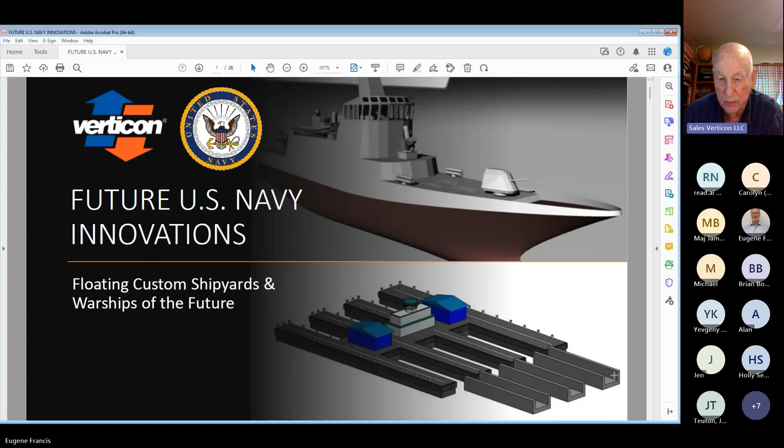Next slide, Eugene. So, we made our initial presentation a couple of years ago. And so I went over this to see if it was still timely, and it is. In fact, it's even more intense right now than it was a couple of years ago.

So what is the status quo that we're dealing with? Well, we've got some gathering storm clouds. We've kind of got these new axis of evil with China, Russia, North Korea, and Iran. We seem to have a current dilemma in our ability to ramp up and meet some of these existential threats. Some people don't even think they're existential threats at this point. I would beg to differ with them. Back in 2014, Congress mandated a 355-ship Navy. And just within the last few months, Admiral Gilday, Chief of Naval Operations, really indicated in one of his discussions that we actually need a 500-ship Navy.

Well, we're struggling to get to a 355-ship Navy, and so a 500-ship Navy was kind of surprising to us. And then Rear Admiral Selby at the Office of Naval Research came up with the concept of small, agile, and many vessels. And since we kind of thought the way things were flowing, I think we were right. Very simple, small, autonomous, agile, attritable vessels or minimally manned vessels seem to be the direction that things are heading. And so that's kind of how we've pitched things.

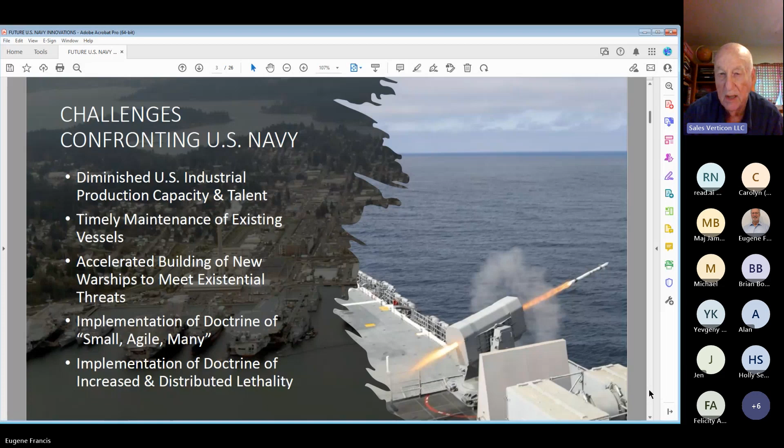So how do we increase production capacity? These are our objectives: we want to significantly improve the maintenance capacity for existing vessels, provide expedited design, engineering, and fabrication of new vessels, and integrate this concept of small, agile, and many.

What we're talking about conceptually is dual use. It doesn't make a lot of difference to us whether it's a naval vessel or a commercial vessel of various kinds. We've had some discussions about building icebreakers. Strangely enough, the Arctic still has ice that needs to be broken. Russia is building new nuclear icebreakers. We have one old icebreaker, the Polar Star, that's broken down half the time. So we think there's probably a need for some icebreakers for the Arctic.

So how does a small business tackle all of this? I know what we do and I know what we don't do. So I defined the areas of talent and capability that we need, went out into the world and identified a lot of key players, brought them in, talked with them, and basically we have a core of true believers.

These are all companies that believe they're Western companies. They all believe in freedom and prosperity and self-determination, and they don't particularly like what's going on with China, Russia, Iran, and North Korea at this point. Some of these are listed here, and we have many, many others that we've added in the interim.

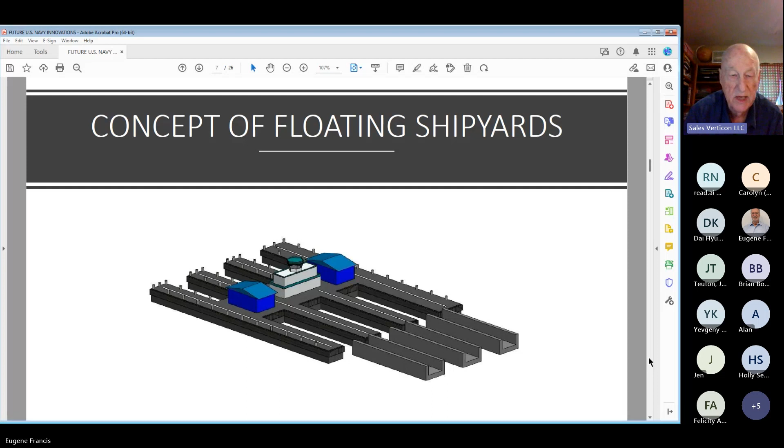Next slide, please. This gives you an example of a floating shipyard that we designed for a country. We'll talk a little bit more about that later.

They're modularly constructed. We can place them anywhere in protected waters. As I said earlier, they're custom designed. Obviously, we have to make sure that they're ecologically sound, so we have to worry about wastewater and all kinds of other processes that give off caustic chemicals or coverings or whatever else. So that's foremost on our mind.

A lot of the shipyards that we have quoted, the modules transit on their own bottoms. That is, there are ships in their own right. They have small crews, and so they don't need tugs. We do build them with supplemental power sources, but the larger ones have all been quoted with propulsion on their own bottoms.

A lot of them are capable of dynamic positioning. So if they're in protected waters in a cove or a harbor, they will station keep within a couple yards or meters and maintain station. There are thrusters strategically located that allow that to happen, as well as a lot of gyroscopic stabilization equipment on board. They are designed to function in all weather conditions.

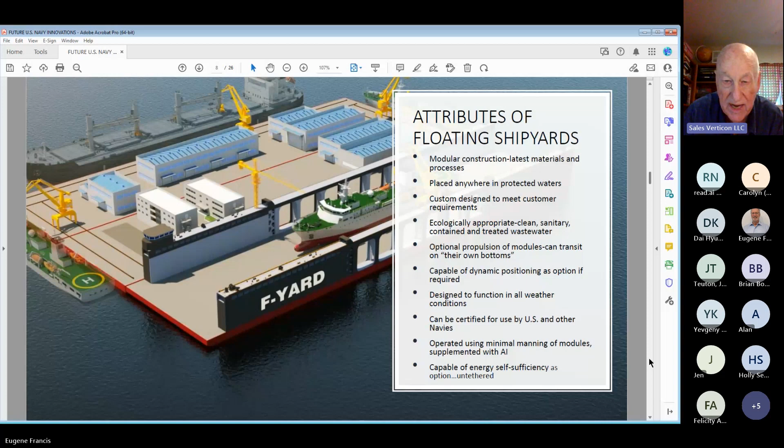Next slide, please. Little story behind this one. This is an actual design that we had presented to the government of the Solomon Islands. And I don't know if you're aware of what's going on with the Solomon Islands right now, but what happened was the Belt and Road Initiative of China came in at about the same time.

This is not unusual for us because we work in many different places, and we continually run into the Chinese Belt and Road situation that we have to contend with. In their infinite wisdom, the Solomon Islands decided to side with China, and I suspect China is probably building some kind of naval facility in the Solomon Islands right now, and we're not.

There are some real practical applications. This does show the breadth of what can be put on these floating shipyards. It basically subsumes advanced manufacturing technologies, robotics, additive manufacturing, all kinds of software. You can call it artificial intelligence, but to me, AI is just somebody else's software. Each one of these shops, each one of these applications, each one of these processes have software implications.

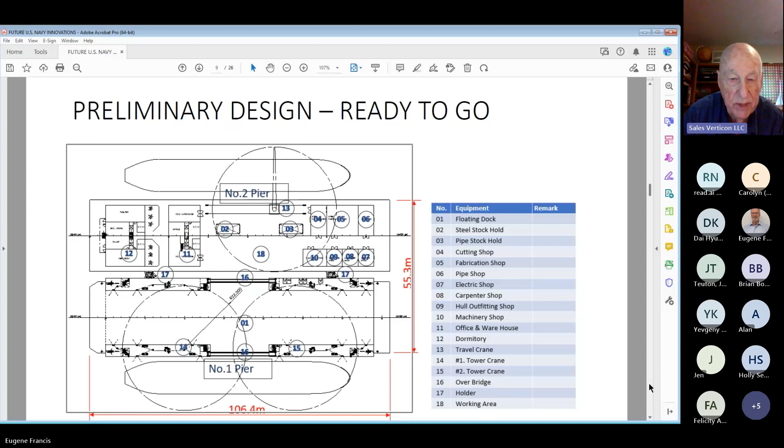Next slide, please. When I mentioned earlier that we pitched a floating shipyard here in Puget Sound, since I've been able to see what's going on at Naval Station Everett and the backlog of Arleigh Burkes over there—they've had as many as 6 or 7 in for maintenance at one time, and it's taken a long time—we thought, let's go ahead and propose something like this.

This is really composed of a number of modules that would transit on their own bottoms. We could have them simultaneously manufactured in different locations and brought together in Puget Sound, reassembled like this.

In the red there, you see those are large floating dry docks. People don't realize that on the west side of the country here and in the Pacific, we're down about four large dry docks. So we wanted to supplement the existing dry docks by producing these larger dry docks. These are very large.

They're 1,000 by 250 feet, so they would accommodate your larger ships. The larger carriers might have a little problem getting in and out, but they're very large and can accommodate very large ships. This could be located in Puget Sound, and it could be geostationary.

It could be tethered as well. Each of the modules would have their own power supply. We're taking a look at some small nuclear power plants right now that may work, but there's all kinds of other green energy we're looking at too. And of course, in Puget Sound, we have to be very careful about all the ecology we'd have to be mindful of. Next slide, please.

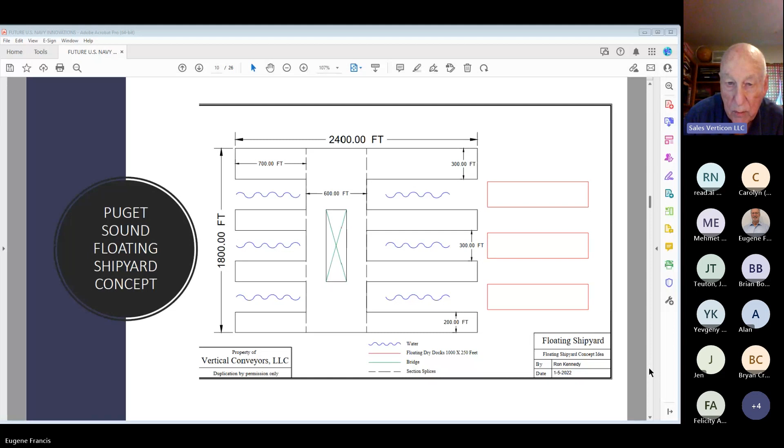So, when I mentioned that we have the ability to move platforms around without them being on their own bottoms, without their own propulsion, we have one of our participant companies, DTG Propulsion from the Netherlands, that provides these large outboard motor type assemblies that can be attached to the outside. You can also use tugs, but if you want to be able to move it around and station keep, then it's handy to have these kinds of thrusters associated with a platform.

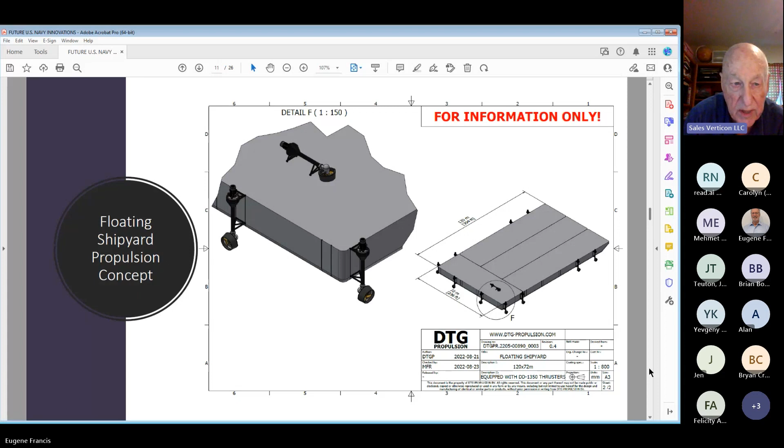Next slide, please. One of the things that we've taken a hard look at is containerizing the workshops. As you saw on that one slide that we did for the Solomon Islands, there were 8 or 10 workshops. Well, these can all be containerized in a single or multiple cargo containers, and that would expedite the placement of them on the platforms for the smaller platforms.

On station for our warfighters very rapidly. Next slide.

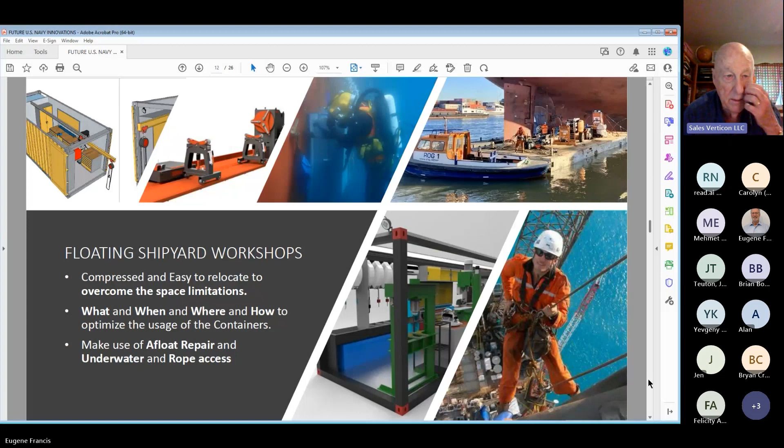So the operating philosophy is basically a merger of all technologies that are appropriate—whether we're talking about artificial intelligence, advanced manufacturing technologies, or digital twinning. We do have the ability right now to design a ship and build it virtually, and give people a headset and allow them to actually walk around the ship and stand on the bridge and look at the placement of all of the instruments and electronics, and provide input as to where things should go. So the idea is using the latest technology, whether it's materials or cyber or AI or advanced manufacturing technologies, 24-hour dark factories—those are all things that we're looking at.

We've got a strong effort going right now in robotics. You see that robot down at the right-hand corner there. We have a number of robotics companies that we have worked with or talked with regarding how one might design robotic work cells to design ships, to build ships. There's been a tremendous amount of work done in that area now, and we think that you can probably replace—there's a problem with welders.

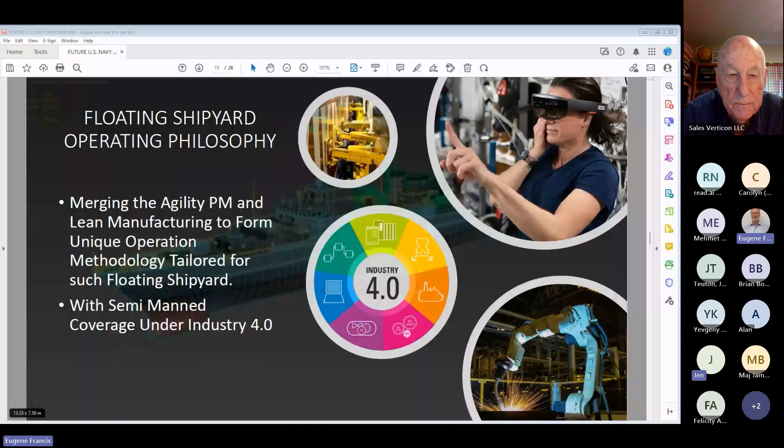Next slide, Eugene. Okay, well Major Best, did you have another question, or is your hand still up? Oh sorry, no sir, my hand's still up, sorry. All right, go ahead. Okay, go ahead, Ron.

All right, so conceptually we've been talking about shipyards, but the question is, if we had a shipyard, what kind of ship would it build? So we've gone ahead, and this is all on our own nickel, by the way, we've funded all of this privately. We've developed a really nasty one we'd call a Variant 1 Corvette, and it's designed around the concept of small, agile, and many, and the concepts of distributed lethality.

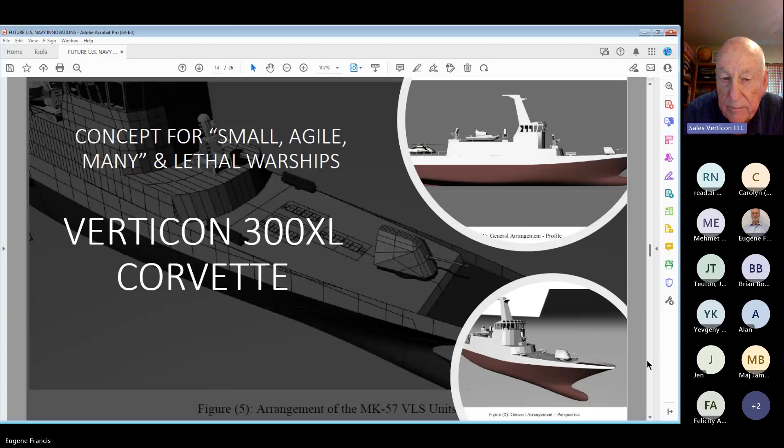Next slide please, we're down to about 10 minutes. We've had a number of design considerations, and it has to do with all of the technologies we're building into these ships. So we're looking at modular construction, moderate displacement, more heavily armored than a typical Corvette, conventional propulsion because it's simple and everybody understands it, fleet-proven systems so things don't go wrong like on the LCSs, and really multi-mission capable with modular weapons loadouts.

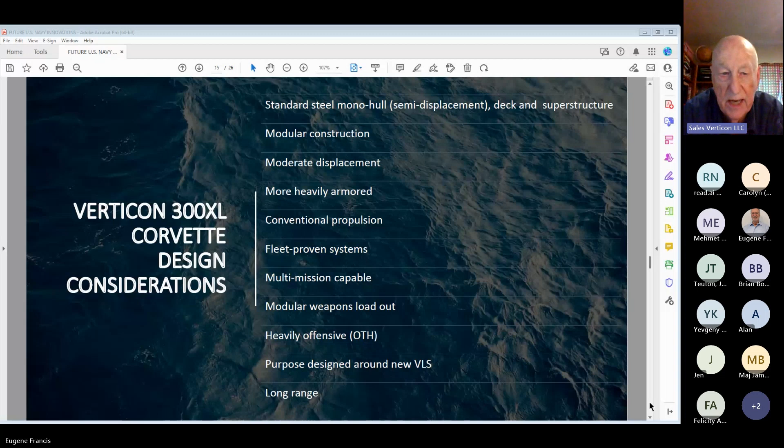Heavily offensive, which will become more obvious as we go through the slides here, designed around a new vertical launch system, not the Mark 41s, but the Mark 57s that handle all of the new missiles coming down the pike, and it has long range and is capable of dwelling for a long period of time. Next slide please, there's a lot of additional design considerations.

Primarily, what we wanted to do was design a ship because, as NATO has told us, 50% of the corvettes in NATO are going to be decommissioned within the next 5 years. They're looking for alternatives. So what we've done is we've tried to take that into consideration from a timing standpoint as well as a design standpoint, and provide them with a multi-use ship that is lethal enough that our enemies will have to pay attention to it, and they will not operate.

And this speaks a bit to the doctrine. We don't believe these will operate with the carrier groups. They're not designed to operate with the carrier battle groups. They are lethal enough in quantity that they're going to have to be accounted for by the enemy and draw fire away from the carrier battle groups.

So I'm assuming, Eugene, that these slides are going to be available for people to take a look at, and we're trying to cover a lot here. So that's generally the concept that we're talking about: very nasty, aggressive, offensively oriented, but very flexible, smaller vessels that you can mass produce.

Next slide, and we go through this pretty quickly. We put this here so that if anybody wants to look at the specific specifications of this particular vessel, this one has 12 VLS on board. We have a variant 2 with a 50-foot insert that allows for another 12 to 16 vertical launch systems, and it still maintains the helicopter pad at the rear. So that would be about 350 feet and displace about 2,200 tons.

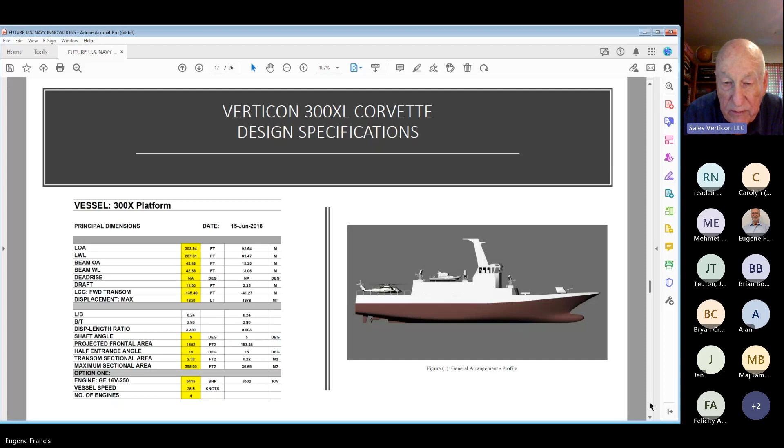So you can look at those. We've done a lot of testing on this already. Go to the next slide and we can talk about that.

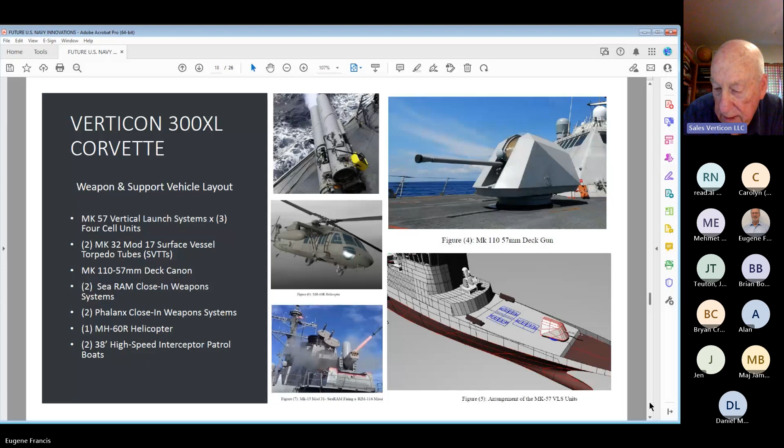Let's go through the armament quickly. There's the Mark 57 vertical launch systems on the foredeck. We've got torpedoes, we've got the deck cannon just in case somebody tries to get too close. We've got two close-in weapon systems, the SeaRAM, which is the rolling airframe, and two Phalanx close-in weapon systems. We have one large MH-60R helicopter that can be used in anti-submarine roles or whatever. And on this particular iteration, we've got two 38-foot high-speed interceptor patrol vessels that could be deployed to handle terrorist vessels in the vicinity. Next slide.

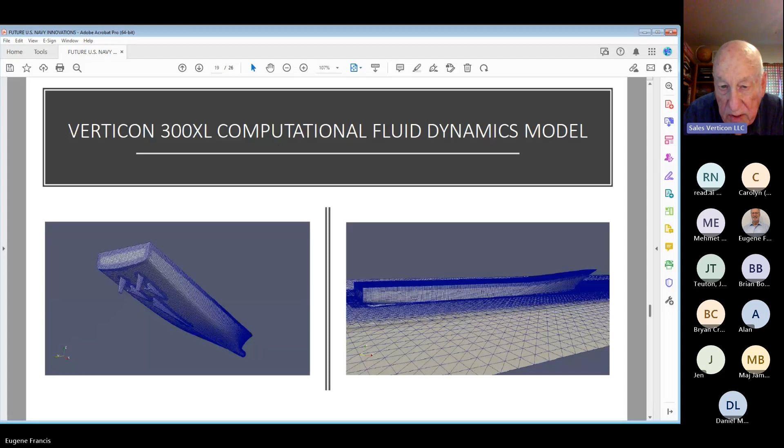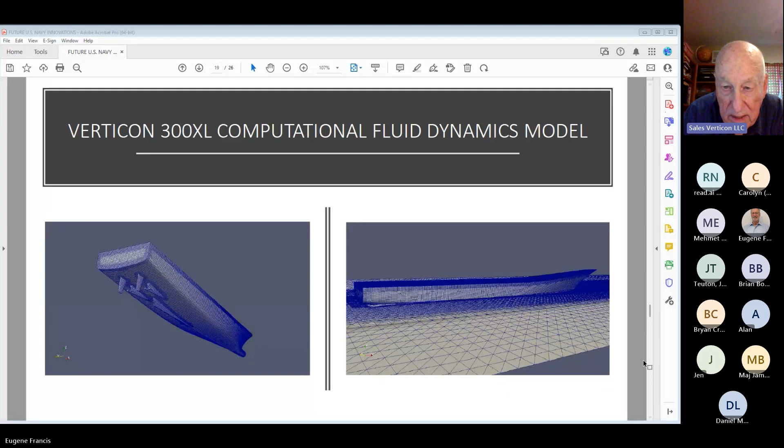We have done considerable engineering on this. We have designed the hull. We have used the supercomputer up at Ohio State University to run the iterations of this, so you can kind of see the pattern that we used. You can see the underside of the vessel. And if you go to the next slide, you can kind of see what it looks like. Skip that slide, you can look at that.

It basically says this is a long-legged ship and it doesn't use a lot of fuel. It uses four low-speed diesel engines that are very simple, very straightforward, through Wärtsilä gearboxes. What you get when you run iterations of a full hull load at various speeds is you can see exactly what kind of stresses and strains there are in the hull, and a bit of what the waveform looks like, which has a lot to do with the efficiency of the vessel. Having the bulbous bow, we tried it without, then put a bulbous bow on it, and it was 18% more efficient, used 18% less fuel, and got 18% better mileage. So the bulbous bow makes some sense.

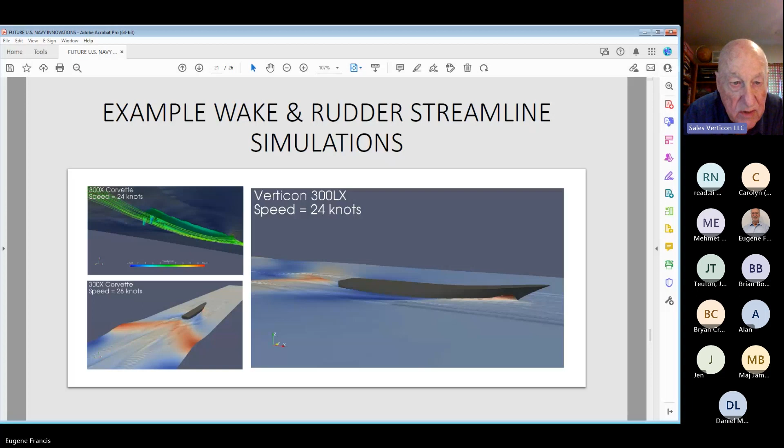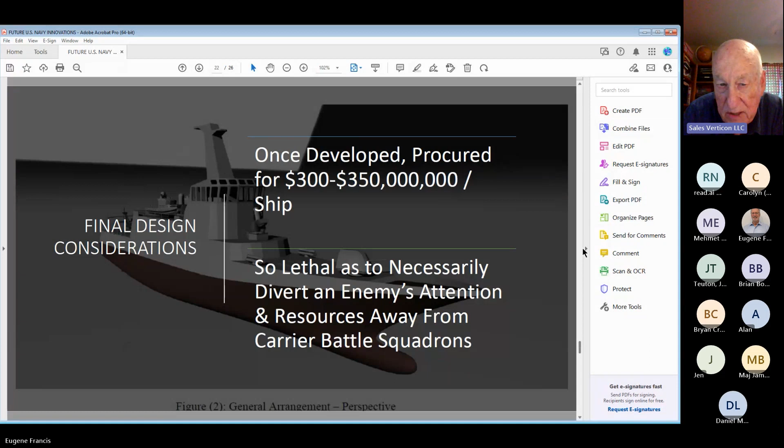Next slide please. And again, we ran it all the way up to the final design considerations. This price kind of depends on what the vessel is meant to do.

Again, referring to the lethality, we want it to be lethal enough that an enemy has to pay attention to these vessels away from the carrier battle squadrons. That's kind of the doctrine - we don't want these with the carrier battle groups, we want them away. I'll give you an example: if we had 3 or 4 of these variants off North Korea with SM-3 anti-ballistic missiles in them, then 3 or 4 of our ships could take care of all the ballistic missiles coming out of North Korea, and they wouldn't be around a battle group - they would be located elsewhere.

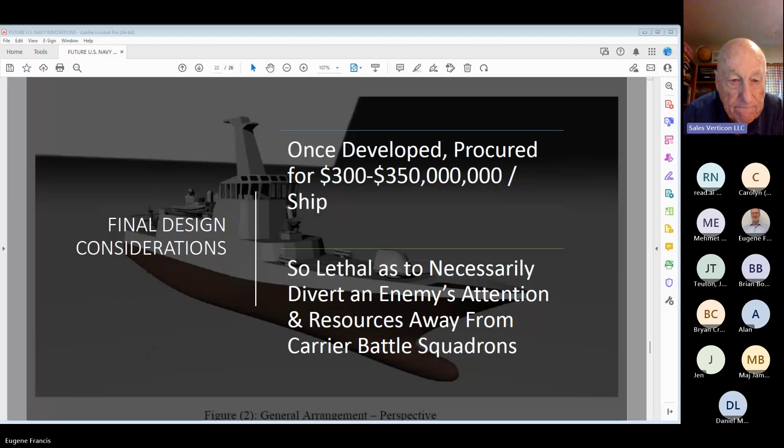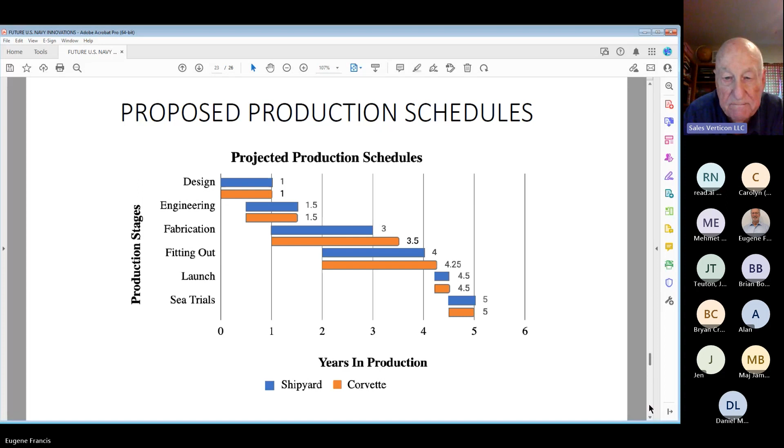So in summation, I looked at what the Navy needed. The Navy purports to need shipyards, so we said we'll build you your shipyards. They need refurbished shipyards, so we said we'll refurbish the shipyards. And they need ships, but the niches for large ships - the carriers, cruisers, frigates - those are already taken by large defense contractors. We'd like an opportunity to work on the small, agile, and mini vessels.

And overlying this, we're still working very hard to come up with an extra-governmental financial system that we and other small defense contractors can use to finance their projects, without having to worry about starting and stopping with the vagaries of the congressional budgeting process. I think that pretty well sums it up conceptually.